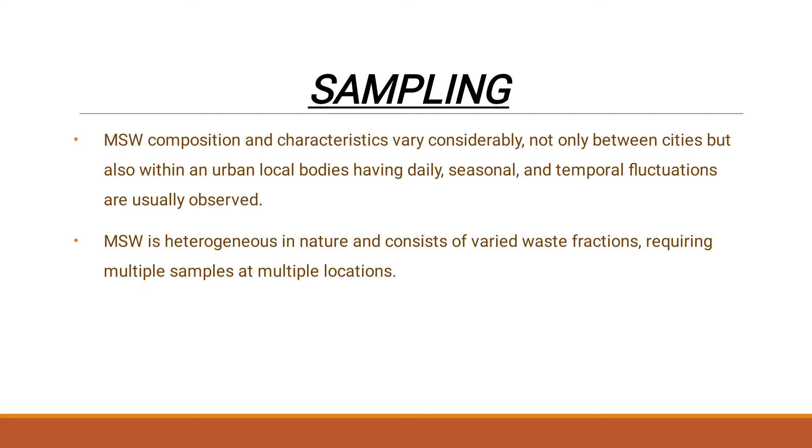So municipal solid waste, we know, is a heterogeneous mixture because it consists of various and diverse types of waste with different characteristics and different composition. So this requires a number of samples to be collected so that it may be easier to determine the composition and its characteristics. One such method is the quartering and coning technique.

In this, the sampling area is chosen and divided into 4 sectors. From these 4 sectors, 2 sectors are chosen and the samples are collected. After that, these 2 sectors are further divided into 4 sectors, and from that sector the sample is taken for analysis.

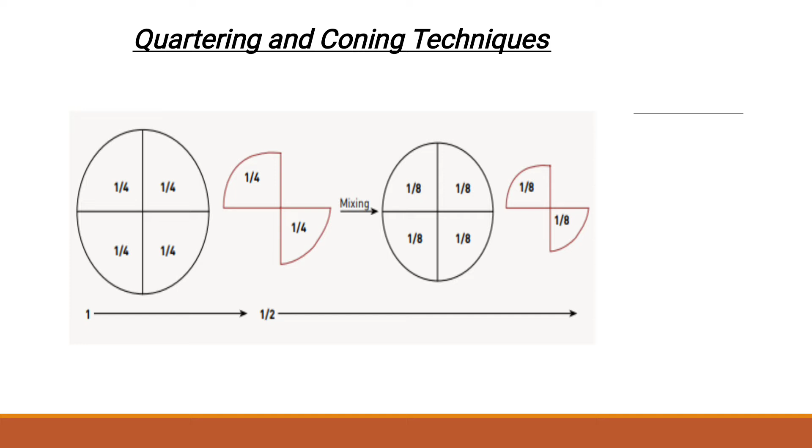Next, in this quartering and coning method, the sampling procedure followed is: initially about 10 kilograms of solid waste is collected within the site and location spot. The sample contains a heterogeneous composition, so the samples must be placed in a uniform heap. The heap is divided into 4 portions, as we see in the diagram, by means of straight lines perpendicular to each other.

After that, from opposite directions, 2 heaps are selected and removed. Then the remaining portion is again thoroughly mixed and divided into 4 sections. From the last remaining, the opposing fraction is identified for physical and chemical characterization. The chemical analysis will be performed in the laboratory of the Ministry of Environment, Forest and Climate Change.

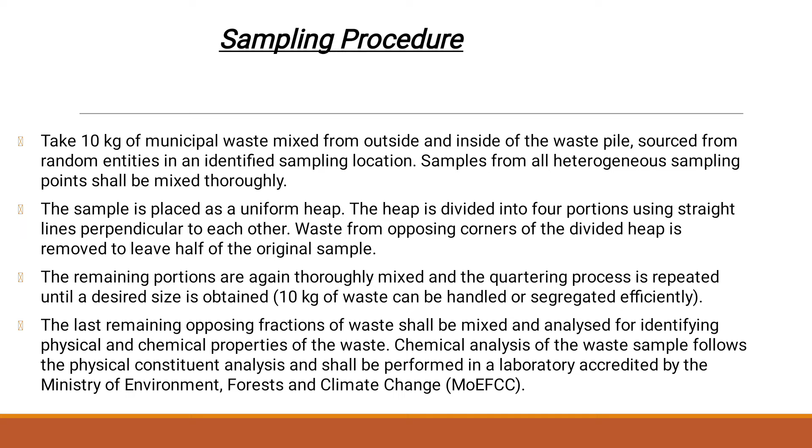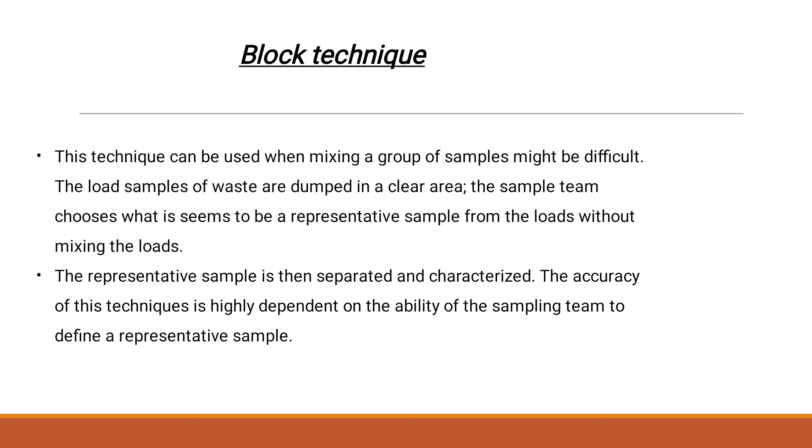Next is the grid technique. In this technique, usually at the landfill area, the overall waste is dumped from the smaller collection units to the disposal site. In this cleared area, each square is assigned to each divided sector, with the help of a letter code for identification.

Then the waste is unloaded in the specific site of the grid and mixed approximately within each square, which was placed for unloading the waste collected from the individual sector. Then the waste characteristics are determined within the set number of squares and compared with the weight and volume of the entire load disposed at the site.

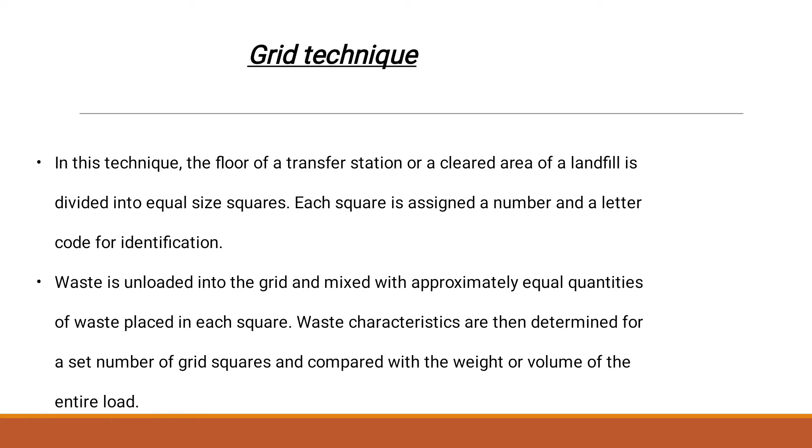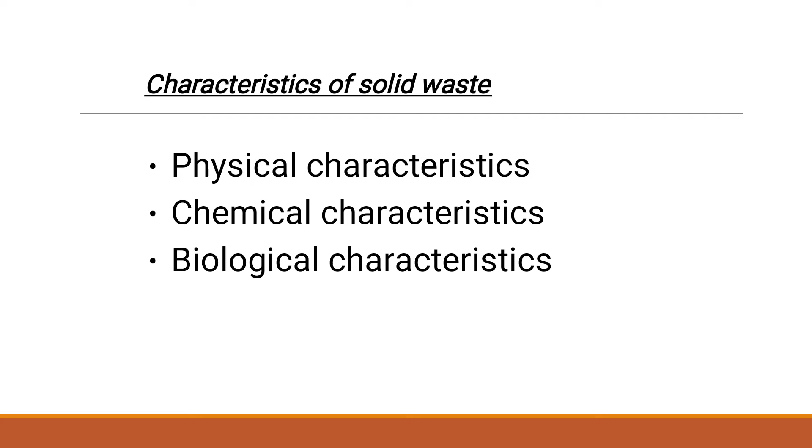Then let's see the characteristics of solid waste. Mainly, the characteristics of solid waste are divided into three types: physical characteristics, chemical characteristics, and biological characteristics. First, let's see physical characteristics. The physical characteristic studied here is density. We know density is mass per unit volume.

This is the major factor which determines how the waste is properly managed, and it also determines the design of the solid waste management system, for example, sanitary landfill, storage, collection and transport. Because through density we can estimate the volume and mass of the waste generated from each sector. Based on that, the area of disposal of waste as well as the collection of waste will be determined.

A volume reduction of about 75% will be obtained with normal compaction equipment. So the vehicle used for carrying the waste will be determined based on the density of the waste disposed from the site. So density is considered an important factor for the proper management of the solid waste system. Next is the moisture content.

Moisture content we already know: it is the ratio of the weight of the water to the total weight of the wet waste. In this moisture content, usually the cost of collection and transport must be taken into consideration. Typically the moisture content will be 20 to 45%, usually represented in arid climate conditions, and in wet regions nearly about 45% can be seen.

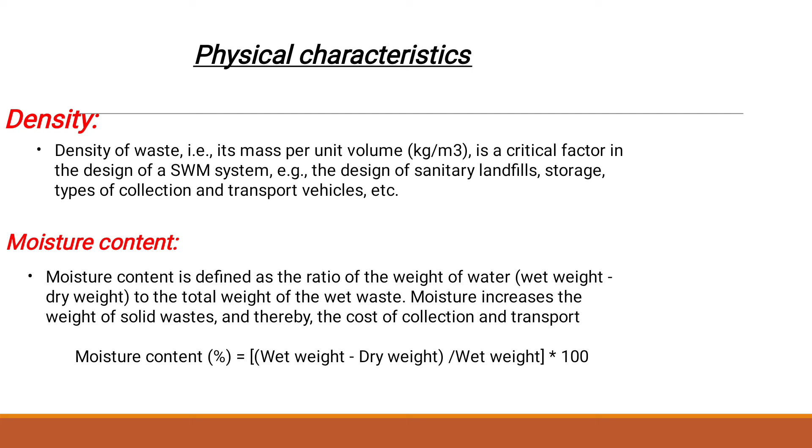This is usually uncommon. So the moisture content is also an important factor in finalizing the economically feasible method of proper management of the waste, since the incineration process needs dried waste. Hence prior to pre-processing or disposal, characteristics such as moisture content must be determined to treat the high proportion of various wastes, mainly food and yard waste.

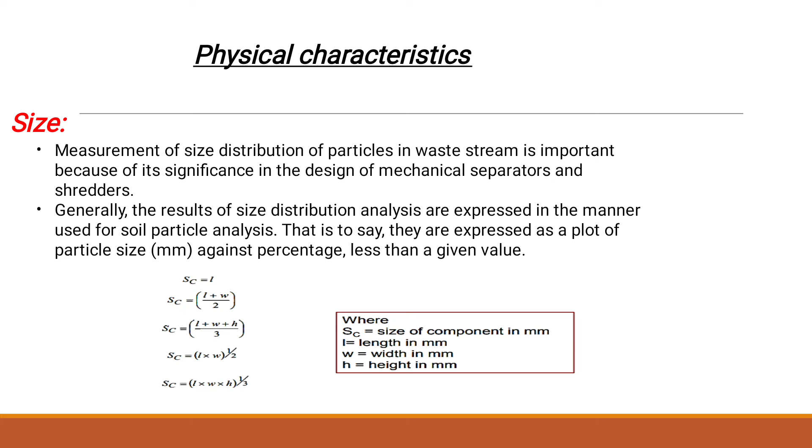This SC, the size of the component: by taking the average of the length and width of the particle, we can usually determine the size of the components. Next one is,

let's see what physical properties are essential in order to dispose the waste in an efficient landfill condition. First we have to determine the field capacity, because the field capacity is one of the factors which determines the efficiency of the landfill, since a landfill is an engineered earthwork structure constructed below the ground surface. The gravitational pull within this area is heavy, hence it is very important to determine the total moisture content in the particular area and the field capacity of that area, how long the waste can withstand in this landfilling process.

Then permeability of the compacted waste. Permeability is a major physical property because it determines the movement of liquid and gas in the landfill. Excess permeability may lead to the escape or infiltration of leachate into the groundwater, which may affect the ecosystem too. So the surface area porosity is an important factor to be considered while properly managing the waste.

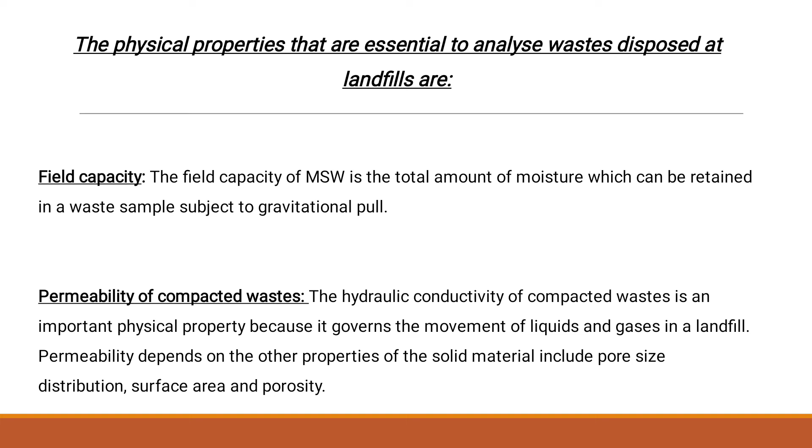Next is porosity. Porosity is the amount of voids that exist per unit overall volume of the material. The porosity of municipal solid waste varies from 0.4 to 0.67 based on the compaction provided for pre-processing. The porosity of solid waste is determined by the formula, and the degree of physical change has also been given in the formula. Hence, using that, the compression index changes will be determined. So these are all the factors essential to be determined in the physical property analysis.

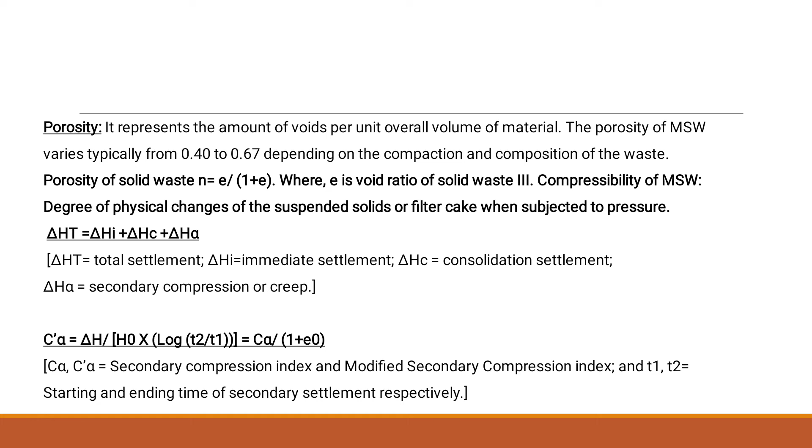Then chemical characteristics. The chemical characteristics of solid waste are very important to understand the behavioral nature of the waste prior to disposal, because the products of decomposition as well as the heating value are important factors to be determined for proper processing of the waste, which can be analyzed using this chemical characteristic method. The rate and products of decomposition must be assessed through chemical analysis. It is better to determine the calorific value in order to deduce the heating value of the solid waste.

Hence, chemical characteristic determination assists in predicting the evolution of syngases and methane from waste processing units. Some of the chemical characteristics are lipids, carbohydrates, proteins, natural fiber, synthetic organic material, non-combustibles, fusing point of ash, and heating value. Lipids means materials such as fats, oils, and greases. The major sources of lipids are garbage, cooking oil and fat, which have a calorific value of 38,000 kilojoules per kilogram. So this waste has high lipid content for energy recovery.

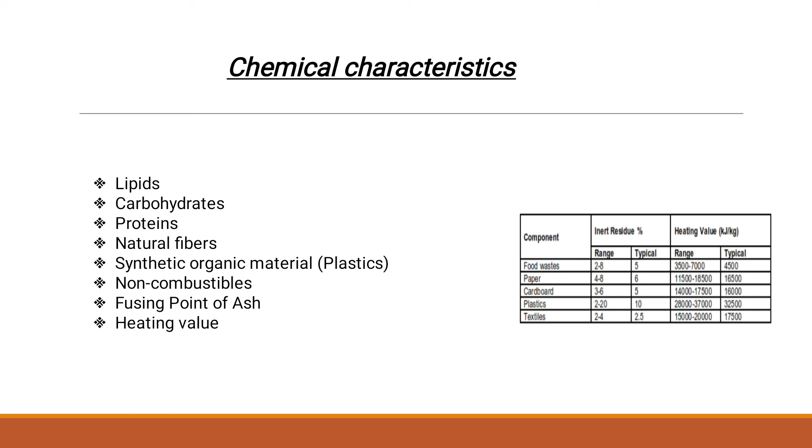So the recycling of plastic is one of the major problems to be faced by each and every individual waste component separation at the disposal site. These are all the ultimate analyses that were carried out during the chemical characterization, and the range of their levels existing in municipal solid waste has been listed, and also by means of proximate analysis, moisture, volatile matter, fixed carbon, glass, metal, ashes can be determined.

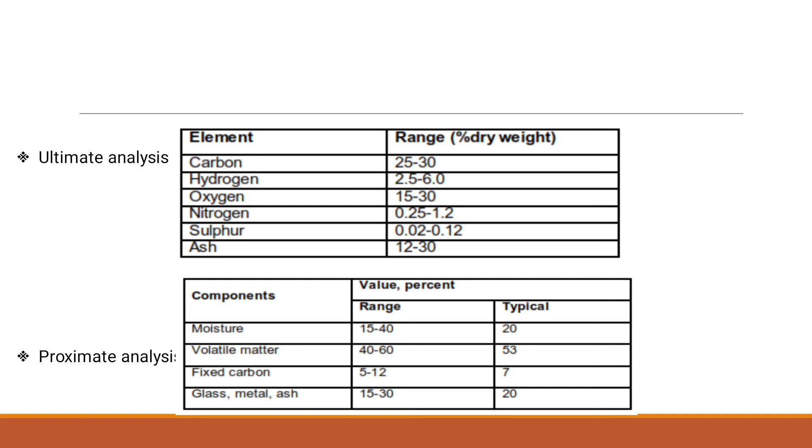Next, biological characteristics. The biological characteristics are one of the important factors to determine the composition of municipal solid waste, which determines how much organic matter can be converted into biogases, as well as the existence of inorganic and inert material. So, during this process, odor production will be minimized, and also the generation of flies can be reduced, since the putrescible organic matter found in municipal solid waste will be pre-treated in the digestion process.

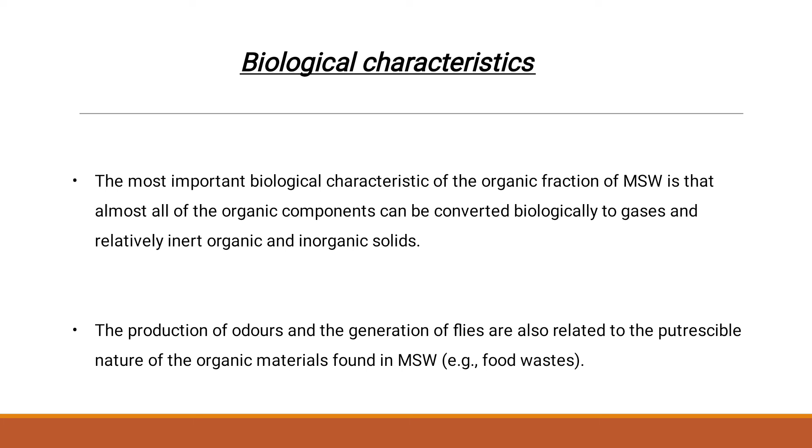Next, the organic fraction existing in municipal solid waste can be classified as follows. That is, water soluble constituents such as sugars, starches, amino acids, various organic acids, etc. Then hemicellulose, which exists in lignocellulosic substances, which consists of 5 to 6 carbon sugars, and also cellulose. This also exists in lignocellulosic substances. Fats, oils, waxes: these are all esters of alcohol and long chain fatty acids.

Lignin is one of the major polymeric compounds that exists in plant varieties as well as in the hemicellulose or the cellulose, with the methoxyl group. Its exact chemical nature has still not been identified, and lignocellulose is a combination of lignin as well as cellulose. Protein is composed of huge amounts of chains of amino acids.

Next, biodegradability of organic waste. Biodegradability is an important factor which determines the level of degradation of organic matter by means of anaerobic process. So, volatile solid content is important to determine for the estimation of biodegradability. Usually, volatile solids are determined by ignition of the waste at 550 degrees Celsius. So, based on this, the biodegradability of organic matter will be determined, and VS is used to describe the biodegradability of the organic fraction of MSW.

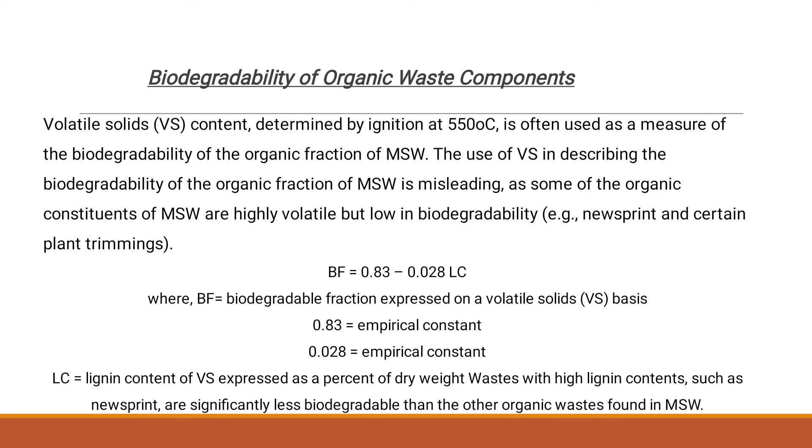Hence, this is the major factor to be determined for efficient management of waste by means of aerobic process. The biodegradability factor can be determined by means of the equation, and lignin content is a major factor to be included while determining the biodegradable fraction.

So next, let's see the factors affecting the generation of solid waste and its characteristics. They are the effect of source reduction, that is, the waste generated at the source must be reduced at the source itself, which also reduces the generation of solid waste, and also the extent of recycling. By reducing the waste at the source, the method of recycling at home level must be induced so that the knowledge can be shared, which can prevent the generation of solid waste.

Then the effect of public attitude and legislation. Proper societal awareness must be created, and proper legislation should be framed by the government for proper management of the sludge. Geographical location: in India, one of the major factors which affects proper management of the sludge is geographical location. So geographic location must be considered in an active way to enhance the minimization of solid waste generation.

Based on seasonal variation, solid waste generation also varies. In case of cold and summer, during the summer season the generation of waste will be more, since people roam freely outside their houses during summer, which may lead to overconsumption of food, which causes excess generation of waste.